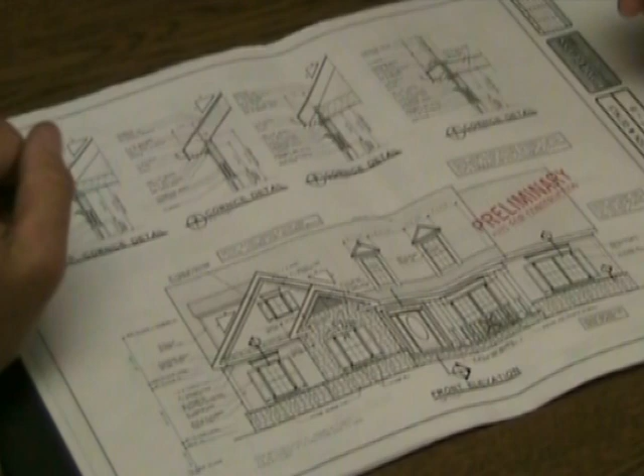So you should have your plans printed out, and what I'd like to do now is have you just follow me along and let's size some floor joists. So the plan we're working on is the Jasmine plan. We can see the front elevation. We can see it's got some brick. It's 2-story in a portion of the house, and that gives us an idea of some things that we may need later on as we go through this.

And we're going to scroll straight through to the basement or foundation plan. And we're going to use this for our first floor framing. Now the reason why we're going to use the basement foundation plan for the first floor framing is because this lines out all the bearing walls that the floor joists will physically be supported on.

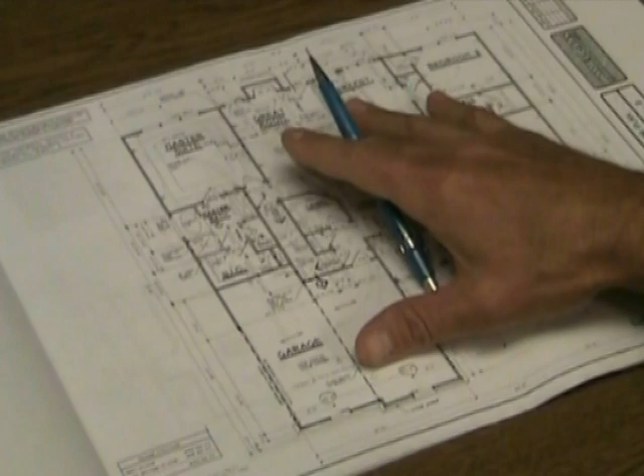So if we turn the page, you can see here's the first floor plan itself, but this shows all the walls above it, and what we're interested in is what are those joists going to bear on that support this particular floor. So remember that anytime you size floor joists, you'll always go to the level below what you want. So for the first floor we will use the basement foundation plan. For our second floor joists we'll use our first floor plan.

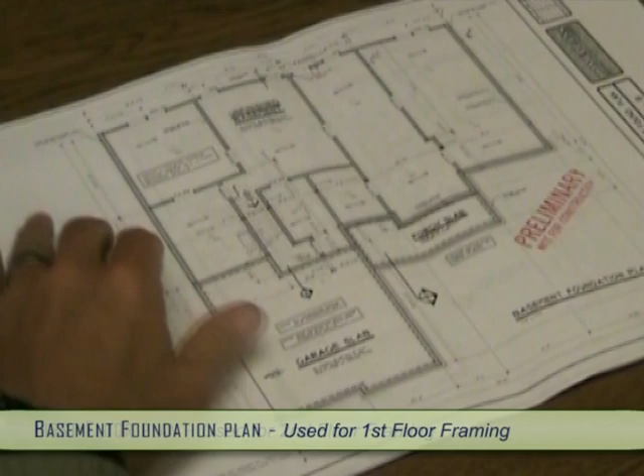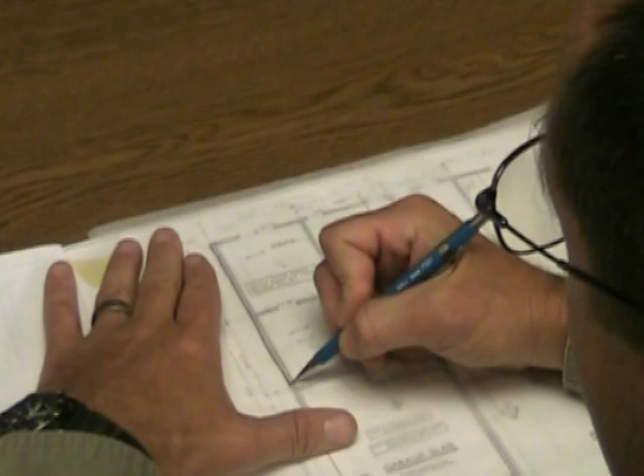But right now we're going to just focus on this first floor, and I'm going to use the tracing paper as I described. And then what we'll do is we'll look for a control point. Any spot that you want to get started on is fine. I'm going to pick this upper left and just follow along with me here. And what I'm going to do is just trace the outline of the floor above, and typically the first floor will follow the outline of the foundation. It's not always perfect. There may be spots where it doesn't, and we'll look for those.

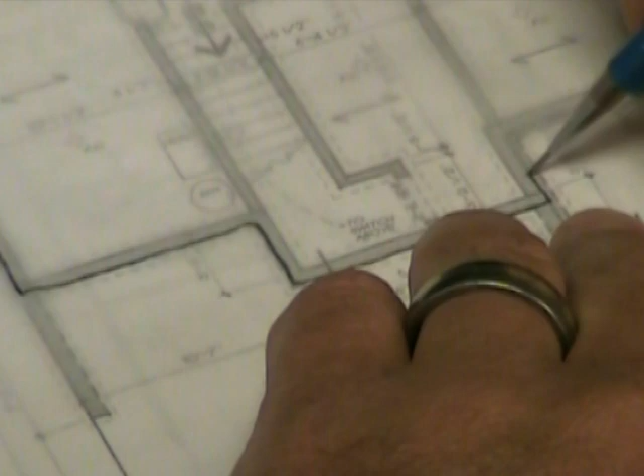As we turn around the garage, for example, the garage is going to be concrete, so clearly that will not have floor joists on top of it, so we will follow the outside of the wall all the way along it. Same thing with the porch here. And notice as I'm doing this here around the porch that there's 3 lines for the foundation wall.

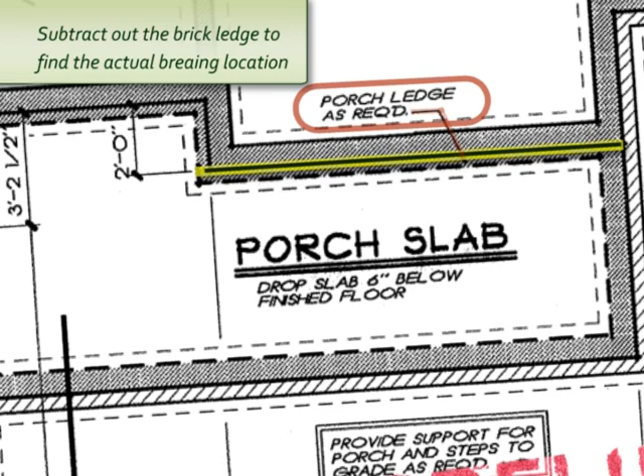I'm going to the interior line here, and the reason why is because that is where the brick ledge would be. So the outside wall would have brick on it. We have to subtract that to get to where the actual floor framing would be. And so you can see now as we turn the corner, the architect has shown very clearly where the brick is, and it's very easy to follow that line.

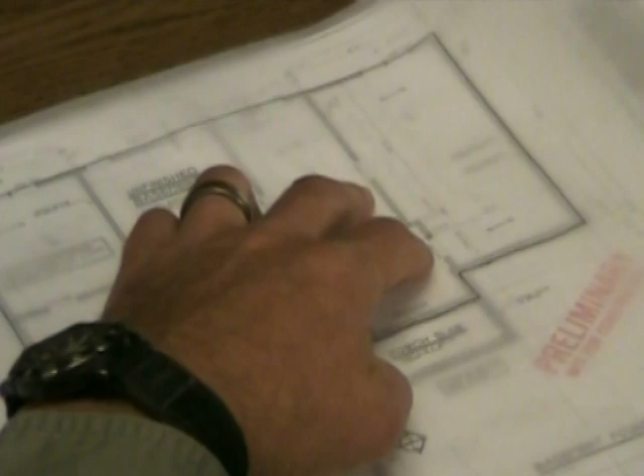Okay, so all we're doing right now is just the exterior bearing walls. So that gives us the basic outline of that first floor. Now let's take a look at the first floor and see if there are some areas we have to be concerned with. And as we look at this, the left-hand side is straight. That follows the foundation. The right side does. It looks like the front and the dining room and the foyer and so on. That lines up pretty nicely.

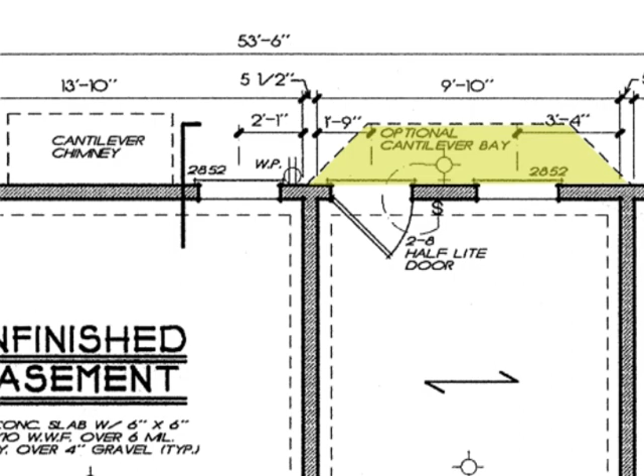But at this back wall here, there is an optional bay and there is a fireplace. So let's take a look at our drawing again here. And you can see that the architect's actually shown where the cantilever is for the fireplace. And we'll just make the assumption that the bay window will be in there.

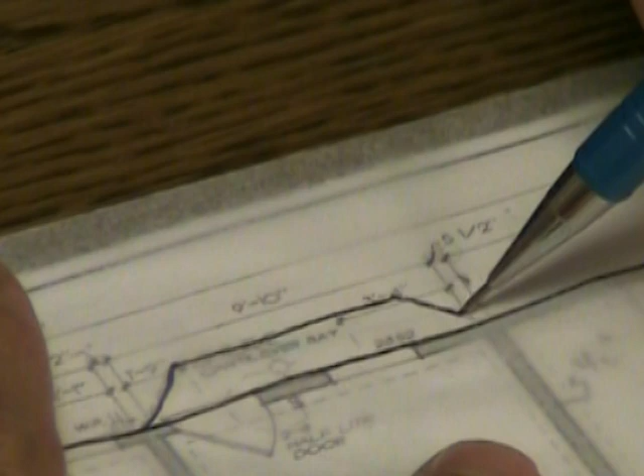There's 2 types of bays. There's ones that you can physically walk out on, which this one is, which is why it's dotted in, which means the floor joist will cantilever this distance over into it. But there's other bay windows that are actually raised up off the floor, so keep your eye out for those instances. If it's raised off the floor, then the floor would not be cantilevered out. So we've got that in place.

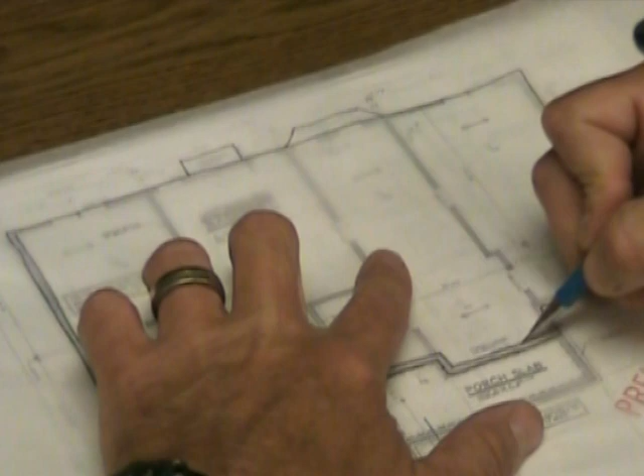Now let's go through and finish up our foundation walls. We want to get the thickness in here. And there's a couple reasons why I like to use this tracing paper too that you should be aware of. One is it keeps the plans clean, so if you've had to borrow a set that someone expects to get back, you'll have a record of it and the plans will come back nice and clean.

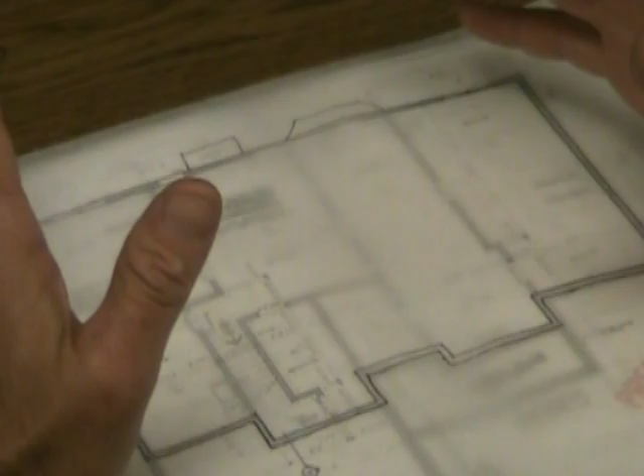The other thing is there's a lot of stuff that can be on a set of plans, and what this does is help to isolate your thinking to just those bearing points for the purposes of sizing joists, and we can get rid of the extraneous information. Then the last thing, before I get into the interior bearing here, is I want to take a look at one more thing, which is stairs.

And you can see that in the foundation there will be stairs coming up to our first floor. What we want to find out is what's the area we have to block off where there's not going to be any floor joists, but there will be stairs. So again, we'll turn to our first floor framing,

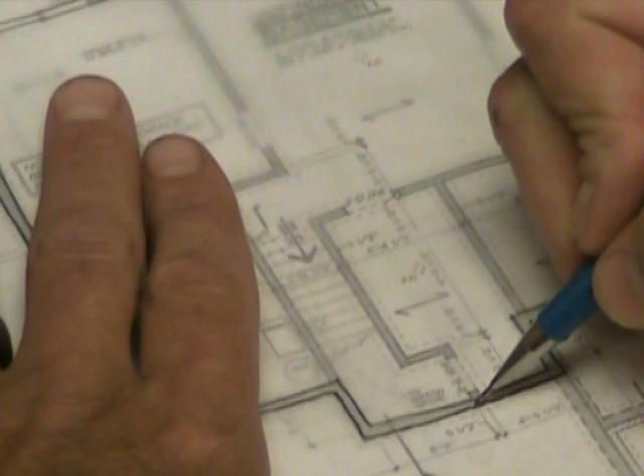and what we want to look for is where do the stairs start and go down, and that's right at this location here. There's a line right across this wall that shows stairs down, and it's roughly 4 feet 7.5 inches or so off the edge of this wall here. I'm not going to get concerned with the exact detail, and this is not the place to get picky about this. What we know is that somewhere around here, and they've got a wall below it, and it looks like it's going to follow this wall here.

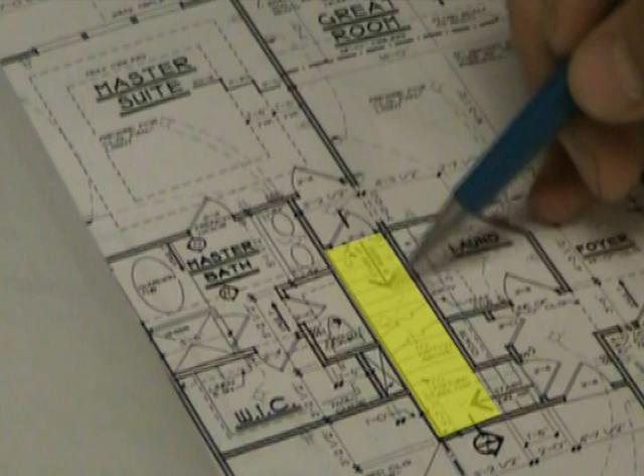We're going to line this out on the inside. We're not sure exactly where the stairs are going to stop here, but let's go back to our first floor again. And you can see right here at this doorway, we're actually coming up again. So the floor will stop right here, and that means this whole area is open for stairs either going down or going up. So we'll go ahead and make a line across here. Again, our purpose here is just to size floor joists, not to get a detailed drawing in place. And then we can finish up drawing these particular walls around the stairs.